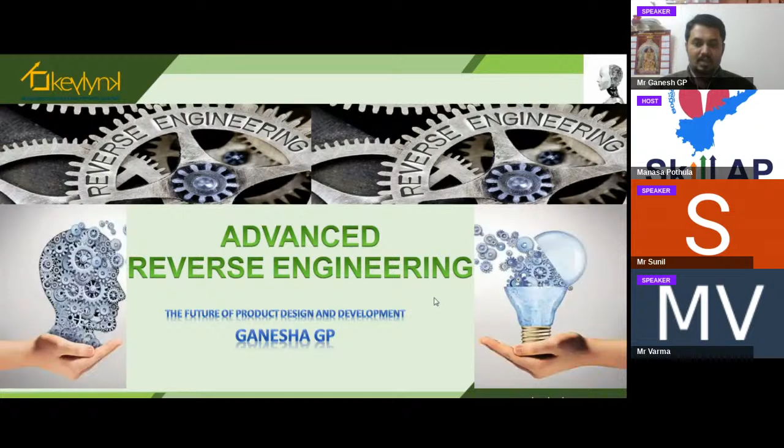Let's start the session. As we know, we are in an engineering field, and as the title I have given here suggests, Advanced Reverse Engineering is the future of product design and development. As we know, engineering is an application of science and technology.

So reverse engineering itself says we're going to do engineering in a reverse manner. Generally we have different types of engineering and different disciplines. Reverse engineering is not only about product development, but there is scope for much more digital advancement nowadays, because from the olden days till now we are having continuous advancement in technology. As we know, product design and manufacturing happens in three phases.

I can put it in brief manner. If I say in a virtual mode, we're going to have virtual prototyping, then rapid prototyping, and then manufacturing. All these three sectors will come under CAD, CAM, CAE. We're going to see that further.

That's why I have given the title Advanced Reverse Engineering. The reverse engineering process started along with forward engineering. With the backup of technological advancement, we have got digital platforms also. So we're going to see different things in this session.

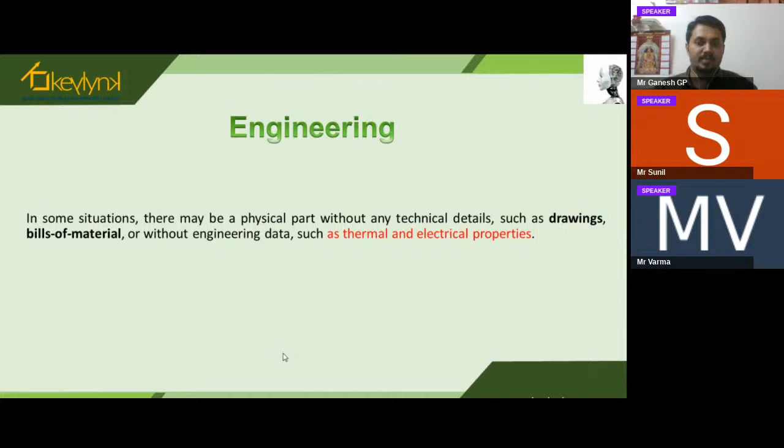In some situations, there may be a physical part without having any BOM, that is bill of material, or drawings, or you may have missing data of thermal and electrical properties. At that time, we're going to have only the physical part, not any other information as mentioned. So at that time, we do reverse engineering.

We're going to have a physical product, and we do a reverse engineering process over it. The reverse engineering process is nothing but duplication of an existing component or sub-assembly product that we already have, without having any documentation - just a scrap product. Using that scrap product by scanning it, we can replicate it and have a modification, a design optimization for that particular product. Finally, we can have further development of concept, and then a modification of the existing design that was there earlier.

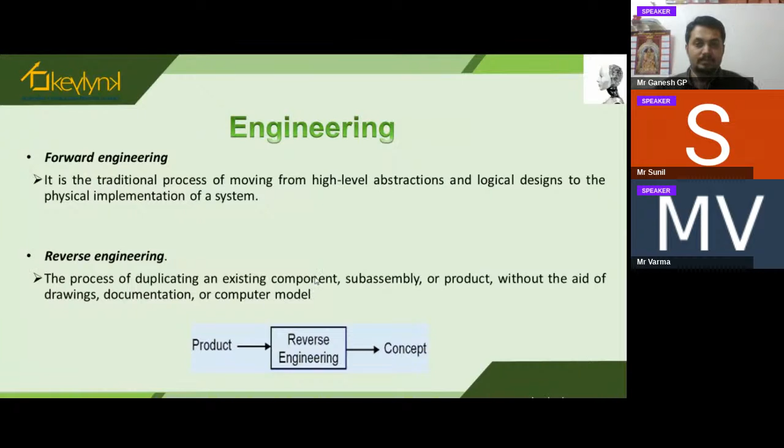So if we come to the history of design, how exactly design was made in early days - we used to have drafts, larger pads, tools and sketches. We were making everything with the help of these kinds of drafts.

I'm happy to share that I started my engineering in 2006. We were actually the first batch to migrate from draft to the digital world - I started with Solid Edge. So instead of having the draft, the migration was from physical creation to virtual creation - from draft work to modeling work, the CAD works. That has been migrated.

In history, we had all these draft tables and sketches, and by using these draft tools we were creating building structures and machine components - everything was created using these tools. Just think of it, with all these papers and tools, how difficult it was to create things with respect to precision and all those things.

Also, documentation was not as easy as we have nowadays, because now we have cloud computing. Because of that, we've got plenty of platforms for virtual creation, and documentation is easy now with respect to PDM software along with CAD modeling software.

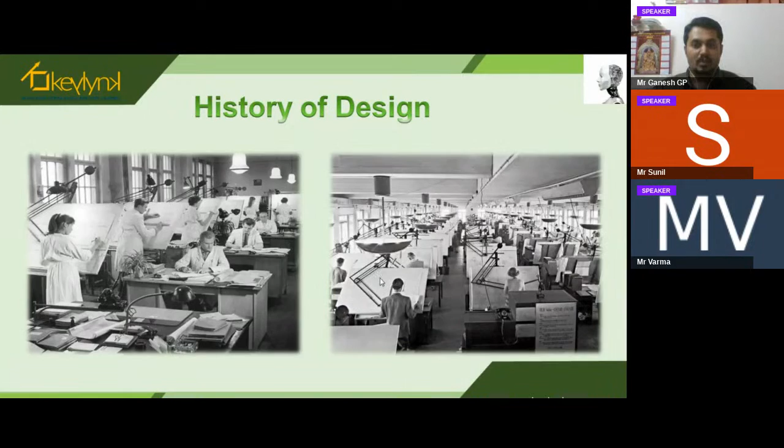So to add on, this is a picture of the layout that they were making in earlier days. You can see if you have visited any layouts, we're going to have...

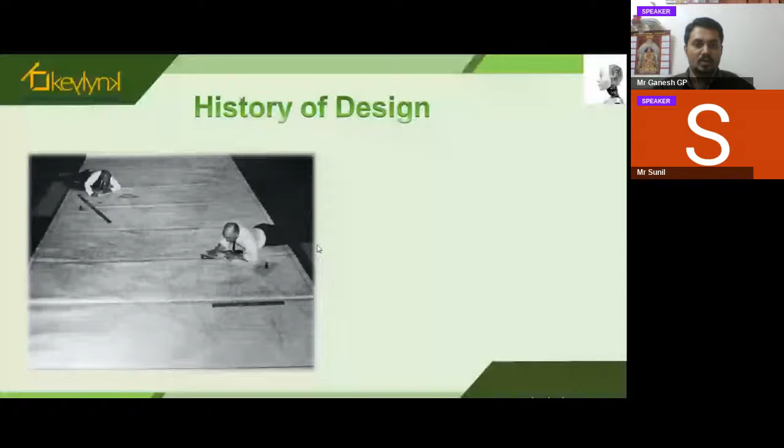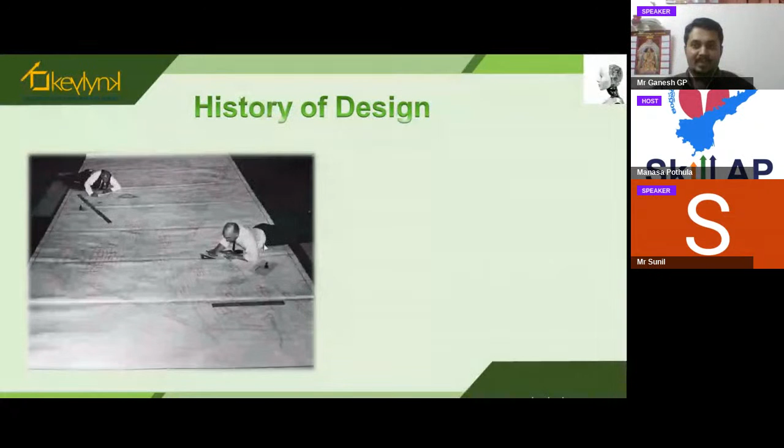Physically, it was a tedious job, as you say. You can see here also, so this was the draft. Still civil engineering has been using this, and mechanical and other engineering platforms in some universities still use conventional knowledge of drafting and skills. It's very much needed actually.

Starting with the geometric model using the CAD system, we were creating the wireframe, surfaces, or solid structures, then converting that into IGS format, that is universal format, or STL binary format, and then importing that format into the CAE system to generate a numerical solution. So as I said, CAD, CAM, CAE - computer aided design, computer aided manufacturing, and computer aided engineering. All three sectors are very, very important in any kind of design.

So here we were using CAD with the help of 2D, and then creating a 3D model, and then converting that into a STEP format or IGS format, universal formats that we used for any analysis purpose. Then for CAM systems, we used it and generated the NC code to have a manufacturing process.

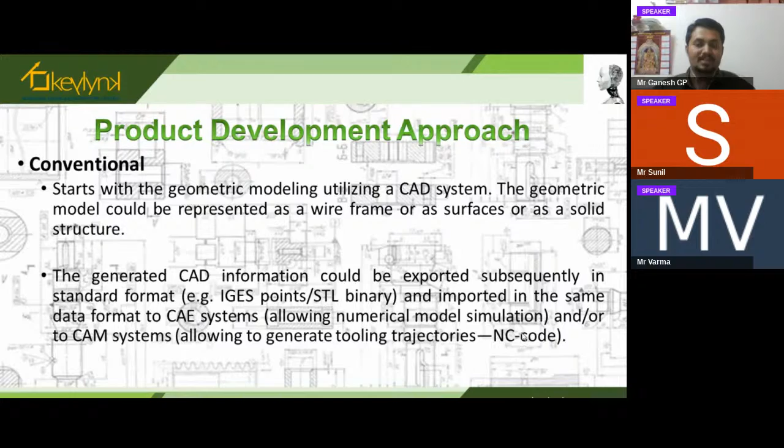But as I said, in the non-conventional method we have a physical model, but suppose if you don't have CAD data or any other data, we can use this physical model and replicate it with the help of a scanned model. We can use scanning operations and then have the entire model and replicate it.

Now we know that Yezdi, Jawa bike was there and they were manufacturing in Mysore actually. Now it has become extinct for so many years, but now Jawa has been manufactured with the help of world data and all those things that they have taken, and they have launched it now.

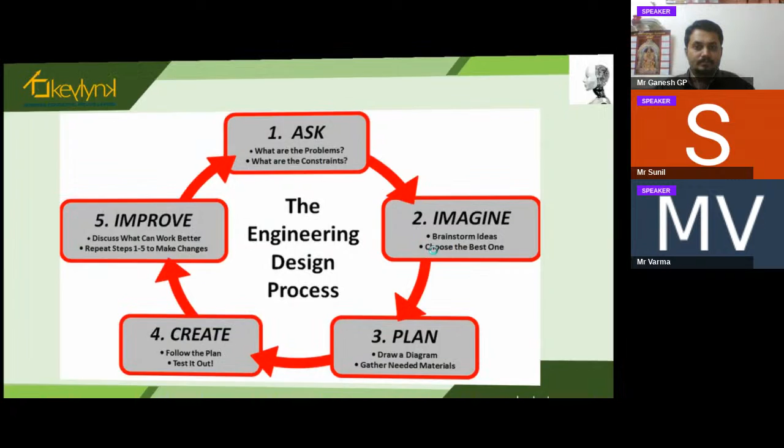So for any design engineering, we normally hear words called invention and innovation. So what exactly is innovation all about, and what is invention?

The major difference we have to know first is invention and innovation. Invention is nothing but creating a new thing. As we know, car has been invented, aeroplane has been invented, bike has been invented, locomotive has been invented, and so many products are there - mobile, laptop, computer, so many systems. Laptop is an advancement or innovation of the computer itself.

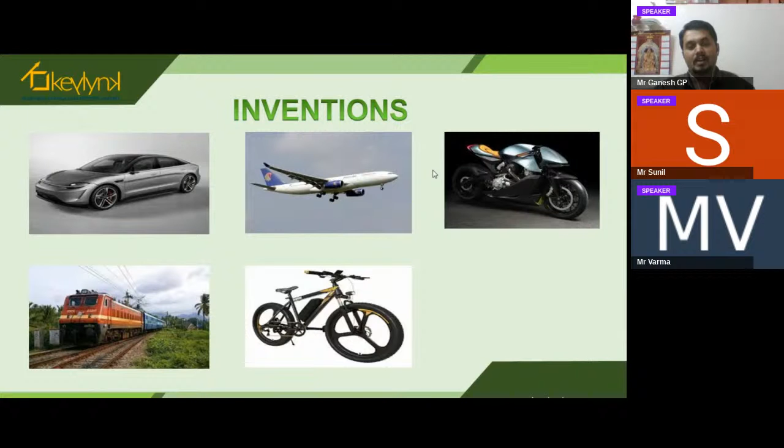So likewise, we're going to see in detail what exactly these inventions are and what exactly innovations are, and how the reverse engineering is correlated and very much needed for this invention and innovation.

So for innovation, I will take up a few examples one by one, and we're going to have a glimpse at each product so that we can understand in a better way how exactly reverse engineering has been adopted.

And how innovation is different from invention. If I take an example of cars, as you see on the screen, when the car was invented, we didn't know it would become a microcar, sedan, CUV or SUV, and so many other types. Now we have a plenty of designs - this is what we call innovation. Car is an invention, and these different types or classes of cars are an innovation. This is how exactly reverse engineering works.

When you invent something, we're going to work on that particular invention and modify some design, styles, aesthetic aspects, or performance aspects. Based on that, we're going to have a complete new product with some innovations, and for that product again we're going to have an invention with higher properties or aspects.

Next, if I take an example of bikes, we're going to have different classes of bikes again. As mentioned in the previous slide, we have different types or classes of cars, and with slight modification and different application, as you do the innovation, always with the help of invention we get some product. Then with respect to the end user or customers, we again have modifications based on their end use.

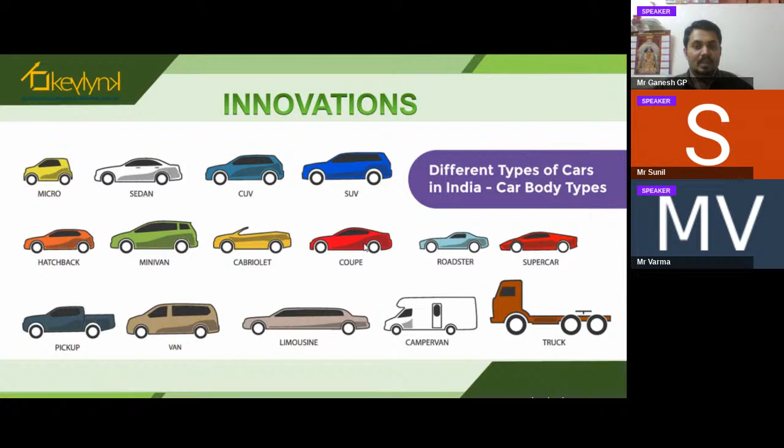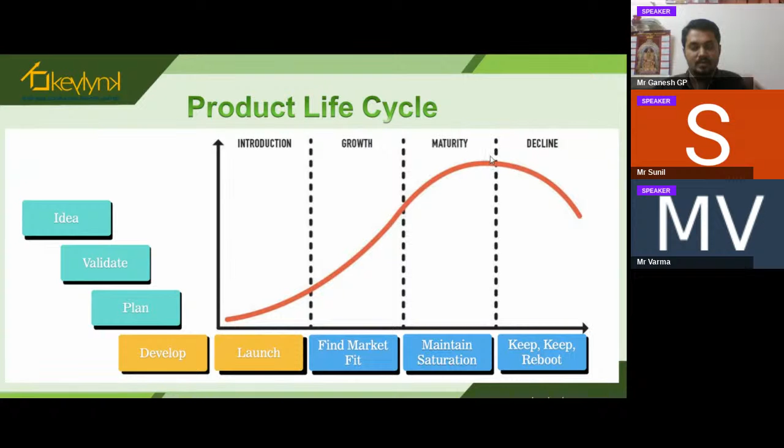So the need for reverse engineering, we'll see one by one. Suppose the original manufacturer of a product no longer produces it, as mentioned earlier, the Yezdi Jawa bike was there in Mysore, but now they are not producing it. For so many years it was not manufactured in India, but now it has been manufactured and brought back. Still, it has to cope up with the market.

Next, there is inadequate documentation of the original design. Even if I take an example of the Ambassador or old vintage cars, we may not be having documentation, that is 2D drawings. So at that time, we must have the physical prototype or physical model. Even if it is scrap, you can take that into the stage where you can have a benchmarking.

So the original manufacturer no longer exists, but externally the product is needed because so many customers who are fond of bikes wanted the Jawa, so that has to be rebuilt and brought down based on customer needs. The original design documentation has been lost or never existed. If you have lost the document but still have a physical prototype or scrap model, you can extract it using sophisticated scanners and get it back.

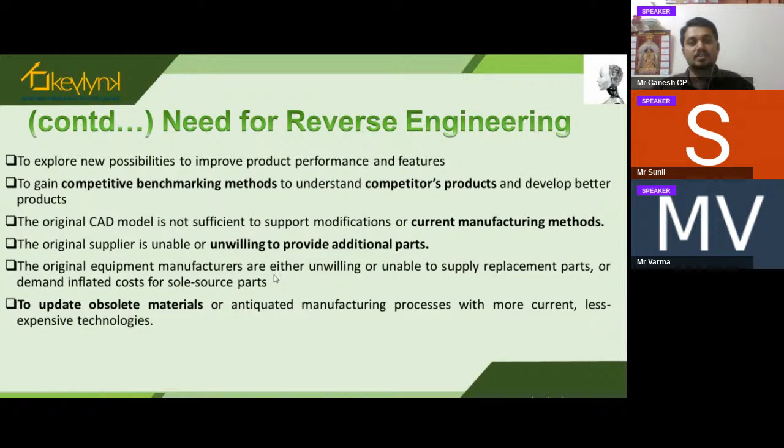And also, before doing any reverse engineering, we're going to see what type of customer it is. Based on that, we're going to have a continuous reverse engineering process, continuous design modification, and again we're going to relaunch it.

So as I said, the need -- if you have a need, then definitely we're going to have a purpose for reverse engineering. Legacy parts replacement, so we're going to have maintenance of that. And suppose if you have parts services and repair, and you want to do any failure analysis, as I said, for each and every product.

So all this, the purpose of engineering will come into picture when you have a proper product life cycle. So the purpose is mainly tied to that product life cycle.

Each and every stage, we're going to continuously observe those particular stages -- four stages -- and then we're going to have all these purposes.

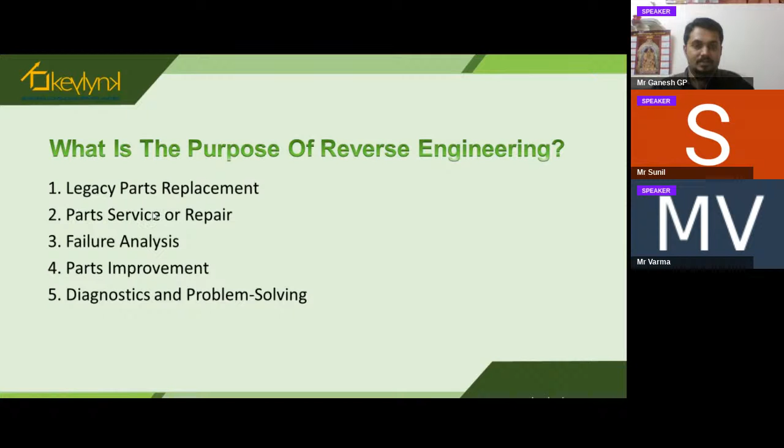So next we'll move on to the actual reverse engineering process -- how exactly the reverse engineering process is happening nowadays, and what advancement of technology we have got.

And as you see on the screen, this is the modern reverse engineering process. It also involves the conventional method of creation as well as the recent development of scan to 3D model.

If you observe the first stage, it is capture of three-dimensional data of a physical object. Earlier days we used to have 2D data -- we'd have drafts, and then we'd create that 2D data into 3D data.

This slide has a blending of both -- we have 2D to 3D, or you can have scanned 3D to again parametric 3D. So scan data gives us conceptual drawings or conceptual 3D models.

So all this data will be there, and with the help of a CAD tool, we're going to convert the 2D into 3D, and then we're going to have CAD creation or design modification happening through different software. Then we're going to have the production, and then we can have an inspection.

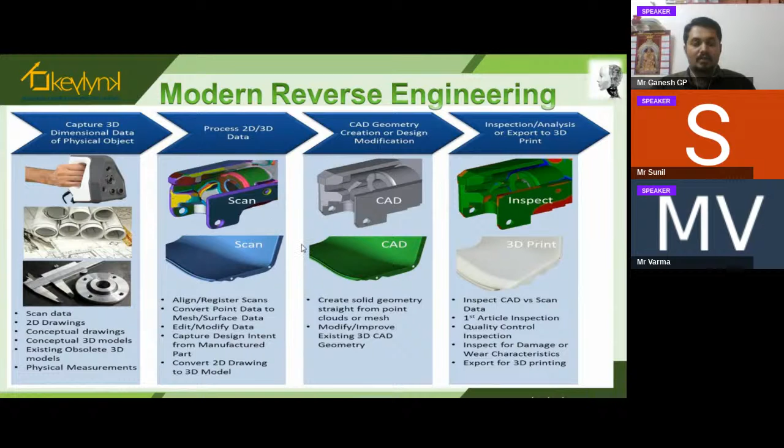So even scanners are used for doing the inspection of each and every product. So the process, as you are seeing here, is 2D to 3D conversion -- we're going to have 2D data, and then convert that with the help of different angular projection methods.

So how exactly does the reverse engineering workflow happen, as I mentioned in the previous slide. As I was talking from the beginning, we're going to have a physical part, either a scrapped part or an existing part.

After having this physical part, we're going to have a scanning process. The scanning process generates scan data, either in the form of point cloud data or mesh data. Normally we call it a .pts model or .mesh model.

So we're going to have .stl format model. Either of two types of model we're going to have, or it may be in obj format also. So normally we have point cloud data or mesh data. All this scan data will be available.

With the help of scan data, we're going to create a mesh. If you have scanned it, you're going to have a generation of each and every coordinate point with respect to the structure. Then by using those points, we're going to have a generation of mesh that will be a triangular element. By creating the mesh, then we're going to have region groups.

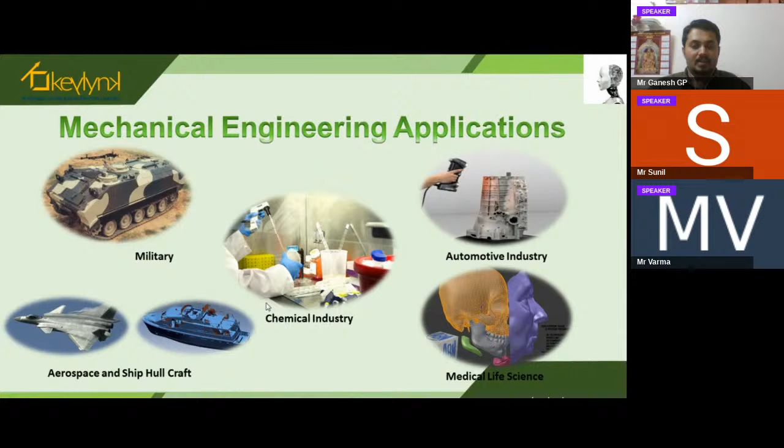In mechanical engineering, suppose you take military or aerospace, chemical industry, automotive industry, or medical and life science — each product has been scanned and modified based on the parameters I mentioned already, either a design aesthetic aspect, a performance aspect, or any other kind reviewed by a customer.

So what are the different benefits that we get through reverse engineering? As I was talking about each and every phase of the product life cycle, we'll more likely get into exploring existing designs and new ones.

That means we're going to have flexibility in design modification. We can explore new sets of thoughts or ideas and incorporate them for further innovations. If I take an example of transportation products — whether a bicycle, a bike, a four-wheeler, or a car — all of these are having advancements nowadays.

Nowadays we are talking about electrical vehicles, so from the IC engine to electrical vehicle advancement — that is an exploration again, that is an innovation again. So reconstructing a product that is outdated — whatever product we were having earlier, the outdated product.

Next, discovering any product vulnerability, meaning if you have any modification, is there any scope for further modification in the existing product? So all this will be having a benefit of doing reverse engineering on any particular product, creating a reliable CAD model for future references.

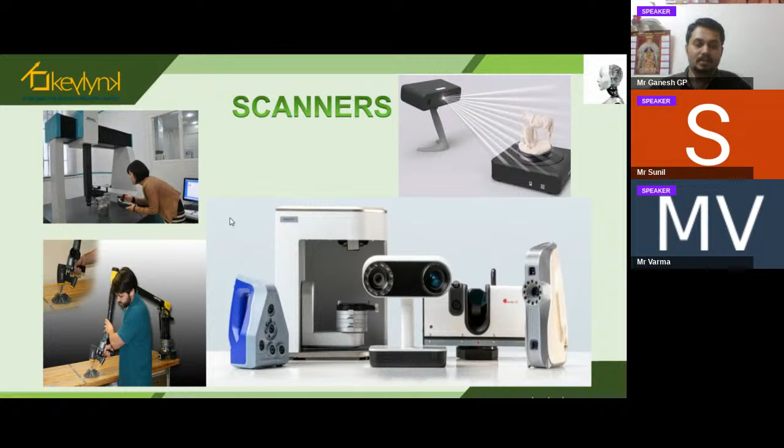As you watched the video, we have got different types of scanners in each and every product that you are seeing, so we have two different kinds of scanners: one is contact type and another one is non-contact type. All these you have seen through video, so that you have got a better understanding than just seeing through images.

In those videos, you might have observed without having any probe sensors. The videos that I have just shown, both of them, we were not having these probe sensors, so those two videos are related to non-contact type. I will show one more video related to the contact type.

This is related to the contact type scanners, where you're going to have these different types of probe sensors, either it may be optical, laser related, photogrammetry, or it may be a CMM. CMM is very widely used in industry for inspection, as I was talking about.

Reverse engineering is not just a tool, along with that there is inspection as well. As you have watched the video, it was showing different types of applications by using a scanner, not only for doing reverse engineering scan models, but it was used for inspection also.

It was used for creation of a miniature as well. So each and every aspect, by creating the mesh or point cloud data, we can extract each and every feature of a particular product with the help of these scanners.

I will show one video related to the probe sensor where exactly the critical shapes can be extracted with the help of probe sensors. For any complex models like car or aeroplane, we can have hand scanners like this. This is of non-contact type. It may be different variants, and each and every product has their own manufacturers.

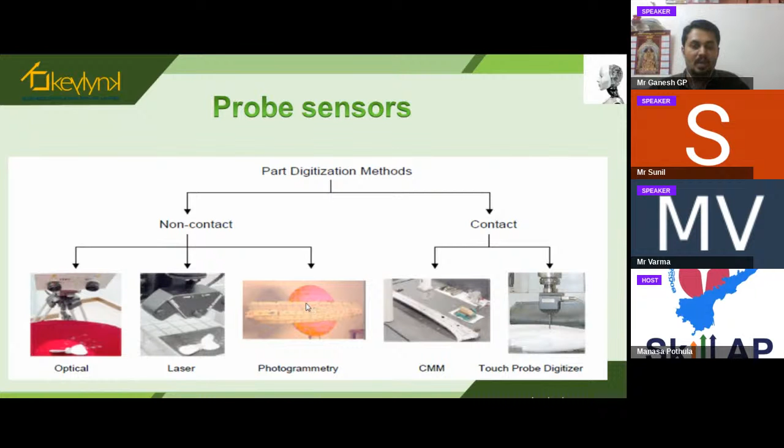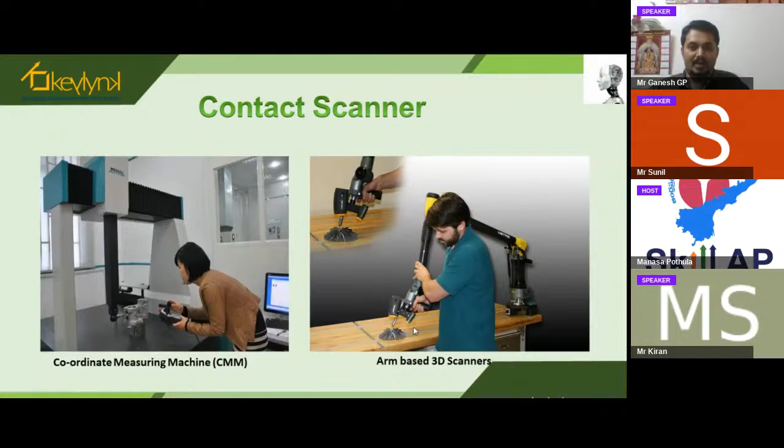So as you've seen that video, you can have a complete overview of contact types. We were having a probe like this, which you can use for better profile extraction or scanning of particular data. Comparing contact type and non-contact type: in non-contact, as the name says, we're not going to have probe contact on that particular product. So if you want detailed extraction of a particular intricate shape, it would be preferred to use contact scanners instead of non-contact scanners.

And we're going to have different types of CAD software. As we know, different CAD tools - either SolidWorks, CATIA, UG, or Creo. Each and every software has their own interface, so we're going to have different graphic user interfaces with respect to the different softwares.

But for this training, I have taken the example of Xtract3D, an add-in for SolidWorks, and also Geomagic for SolidWorks and Point2CAD. Majorly, Xtract3D and Geomagic are used as reverse engineering tools for SolidWorks. These tools have a live transfer option for different kinds of software - either SolidWorks, CATIA, or Creo. We have a live transfer in the sense that we're going to create the exact similar model that we normally create in a 3D model.

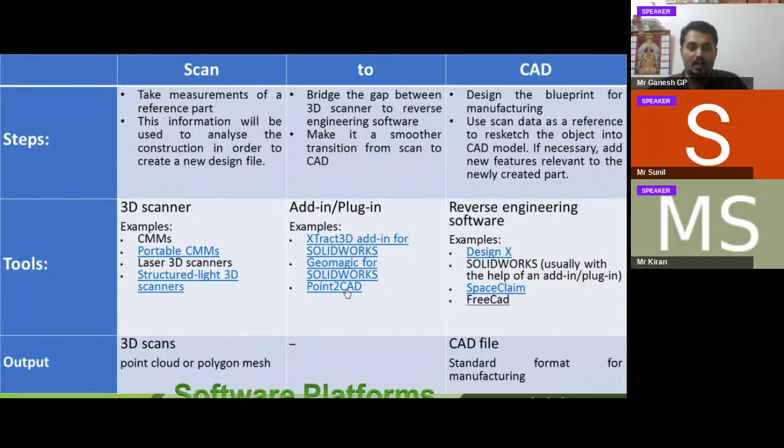That will be created by using the Geomagic DesignX software. By using DesignX software, we're going to create a model - either a parametric model or a non-parametric model. After creating each profile, we're going to have a live transfer, which I will show you at the end, and I'll explain exactly how the process happens and how the reverse engineering tool has been used and converted into a CAD file. So this is how the steps and different software platforms work for reverse engineering.

And normally in each reverse engineering process, we have one question: which option is right for me? The industry may ask whether I've got to use contact type or non-contact type. Again, it depends on the type of product you are making as a reverse engineering product, and how exactly that scanning method is used to extract the data clearly.

The end product that you're going to make has to undergo innovation or modification. For that purpose, you need a better scan data to have very good quality data. So the selection of scanner is also very, very important - what is the best method of scanning technology or technique you will use. Based on that, the end product will reflect, because quality matters again.

With respect to the normal scanning or benchmarking method used in earlier days - manually measuring each product and replicating it into 2D and then creating it into 3D - it was very complex. Now it is not like that. By extracting each coordinate point, we can have accuracy almost at the micron, even nano level. That much accuracy we can see in scanners. As you watched in the video, they mentioned 25 microns, 50 microns - that is the depth of accuracy we get through the scanning process.

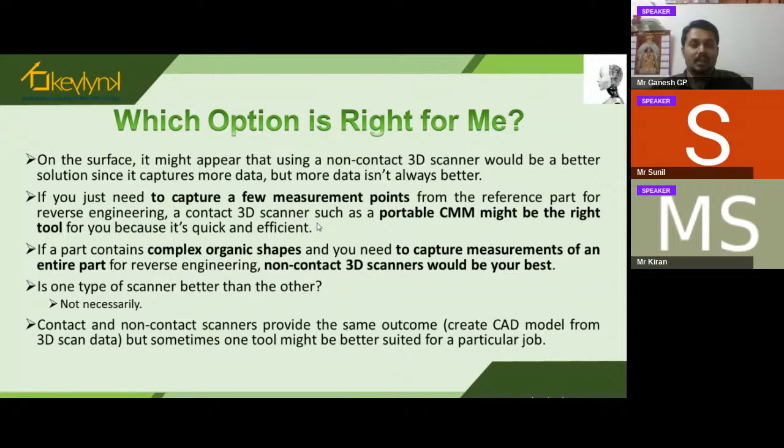So then about 3D printing, this also comes under CAD CAM CAE, as I was mentioning earlier about 3D printing.

Suppose you have a reverse engineering component, nowadays even a small gift product that you see in gift shops or markets, each and every such product is a mold product. Now because of the advancement of 3D technologies, rapid prototyping and assembly all come under additive manufacturing. Additive manufacturing has seen a lot of advancement for product development as well as reverse engineering. We now even have examples of 3D built houses in Dubai, where in Arab countries they are making 3D printed houses.

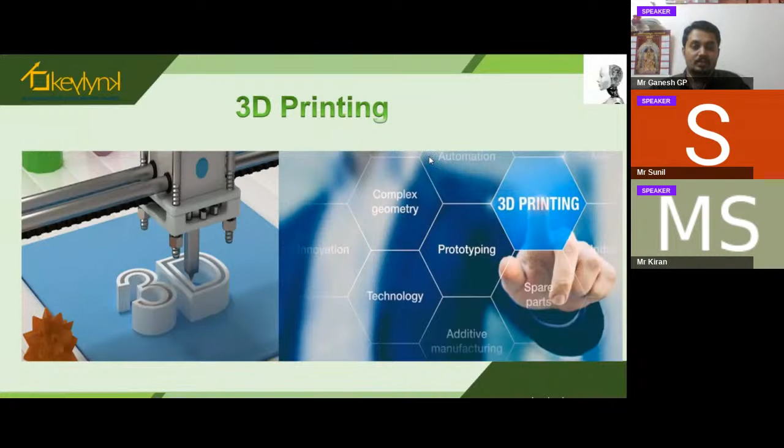With the help of these 3D printing technologies, we can get all these kinds of products in very little time, and also without any wastage of materials and such things.

Now 3D printing technology is focusing on getting products with the help of metals and alloys, which is a very difficult job to achieve. So research is happening in that direction.

If we take these examples into account, 3D printing technology has even been used for creating patterns for mold or casting. So likewise, there are plenty of uses for 3D printing technology.

As I mentioned, through that scan data you can enter directly into CAD CAM CAE. This is also a reverse engineering product with modification, and you're going to have a prototype, or it may be a pattern for making a casting, or it may be a jig, or it may be a fixture for creating a product.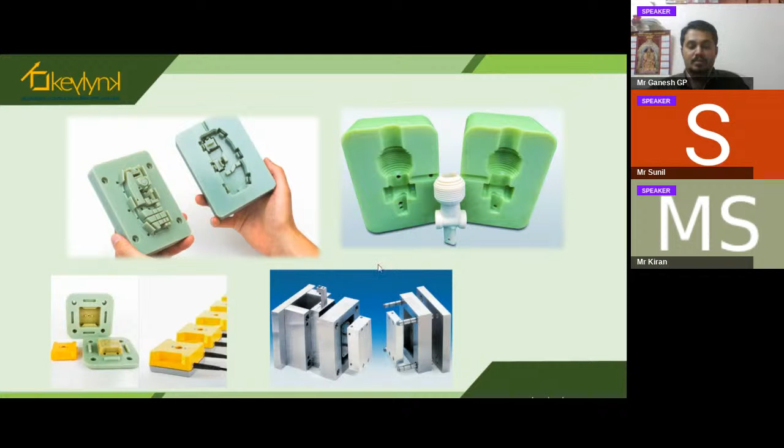In engineering, creating a product requires considering how important the design is. Equally important is tooling - creating a tool to make a particular product is a tedious job. Creating jigs and fixtures would be very helpful for recreation and modification with the help of reverse engineering, which is an added advantage for the reverse engineering process.

As I said, the future of reverse engineering again comes under CAD CAM CAE. As I mentioned in the beginning, we have rapid prototyping - initially virtual prototyping, then rapid prototyping, and then manufacturing. This is the sequence of operations carried out in industry.

So we're going to have a scanned model - this is geometric reverse engineering, and this is how the process happens. If you have a scanned model, with the help of that we can create a CAD model and then send it to CAM, so that NC generation and profile generation happens with the help of programming. The machine will complete that particular product with respect to its features. Also, after completing the product in terms of CAD, then we go for CAE.

So we're going to do the engineering analysis, whether it will work for the existing environment with respect to the load conditions or the performance characteristics. So with the help of different CAE tools, ANSYS, mainly ANSYS Workbench is being used, Nastran. So many software CAE tools are there.

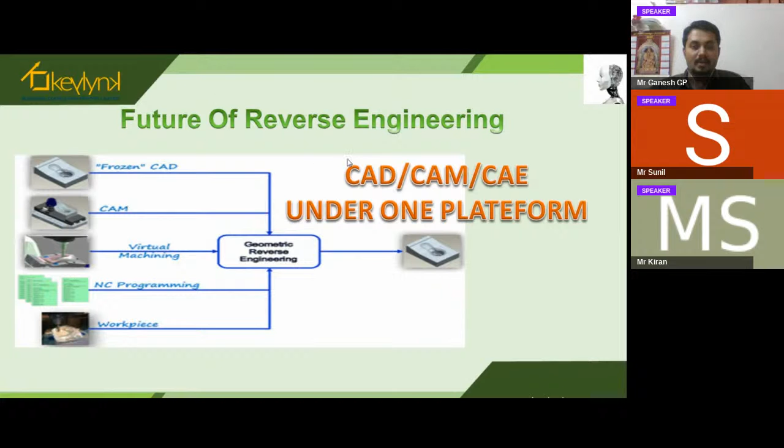And then we have Mastercam, NC programming software. Each and every CNC machine, Fanuc and different softwares, the machine itself will give an interface. So different industries will have their own interface. With the help of that scan data, imagine all these three platforms are under observation and under the control of this reverse engineering process. So the complete process will happen through this media.

And normally each and every person will have a question. So everything is okay, that means the technology is advancing and the situation is like this. And what could be the job opportunities for the reverse engineering field?

That means reverse engineering is a part of R&D. As the name itself says, research and development. That will happen through reverse engineering only. So there we're going to have a design stream or design field.

So there, all these job profiles or designations are extracted through different job sites and job descriptions in industry. They will call these designations either design engineer, R&D engineer, CAD, CAM, project research technician, application engineer. These are all the normal designations that you will get when you get into the design stream of jobs, or it may be an R&D job.

So these are the different job opportunities you can expect by knowing this reverse engineering process. But fundamental and basic things you must know about it.

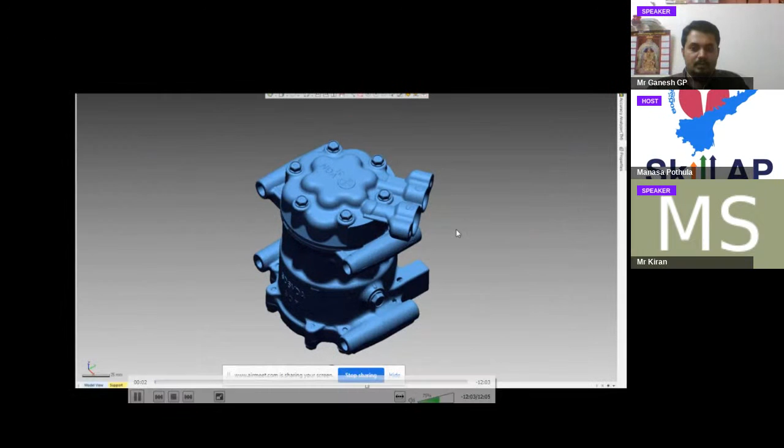This is one of the mechanical components that you are seeing. This is the scan data that we have. After scanning, we're going to have different types of regions, as you see here with different colors. First we scan the entire model. After scanning, we're going to have the region or grouping by using the software, either DesignX or any other tool. For now, I have taken the example of DesignX.

So here we have different regions, and each region has different colors, meaning we are having different mesh data with respect to triangular shapes. Normally we're going to have a tetra mesh, so triangular elements. For different types of intricate or curved shapes, we're going to have small triangles. Likewise, we're going to have different scanned triangles.

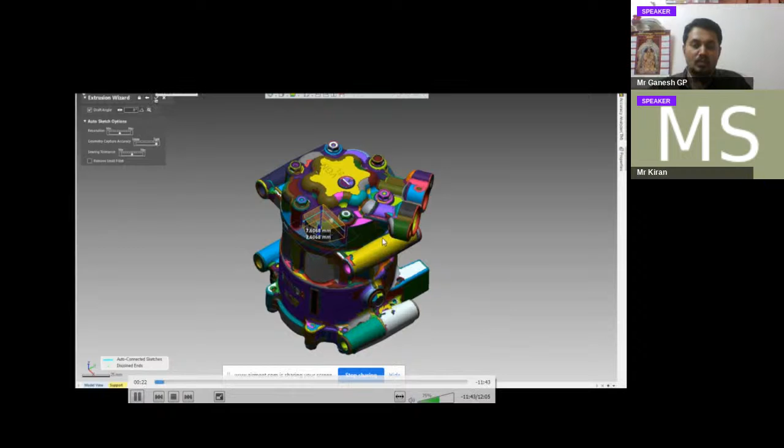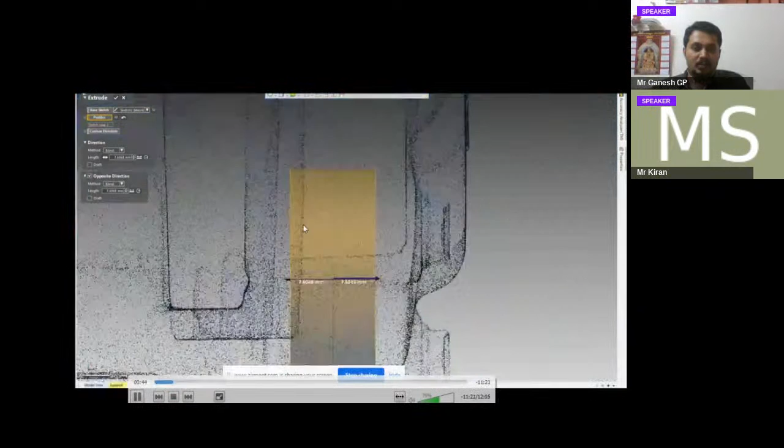Based on the profile that we have, we're going to select those particular regions. By choosing those regions, we can have a normal extrude operation. If you know about CAD software, you can understand better what the video is telling you. By having this reference, with the help of a region, this is a non-parametric model, just an extraction of a circle, and then we are extruding it and matching it with the scanned model.

So we are just creating this with respect to the dimension that we have in the CAD model. Likewise, you can have each and every operation, either a fillet or an extrude. Extrude is just creating this circle with respect to the length that we have. With respect to the number of profiles we have here, we have six of the same kind, so we are using a pattern tool to create it.

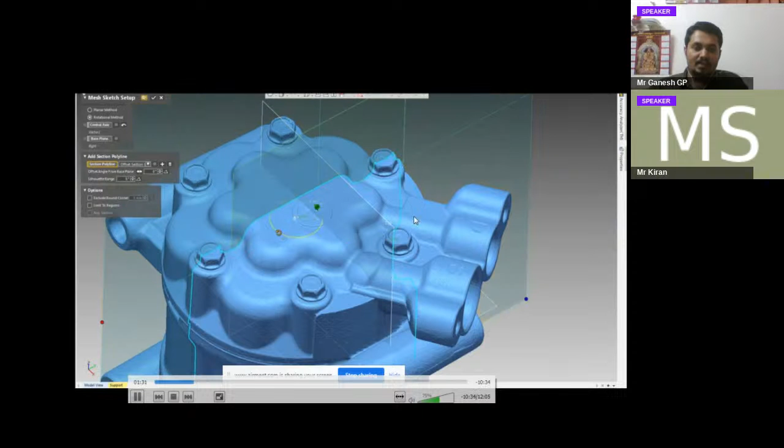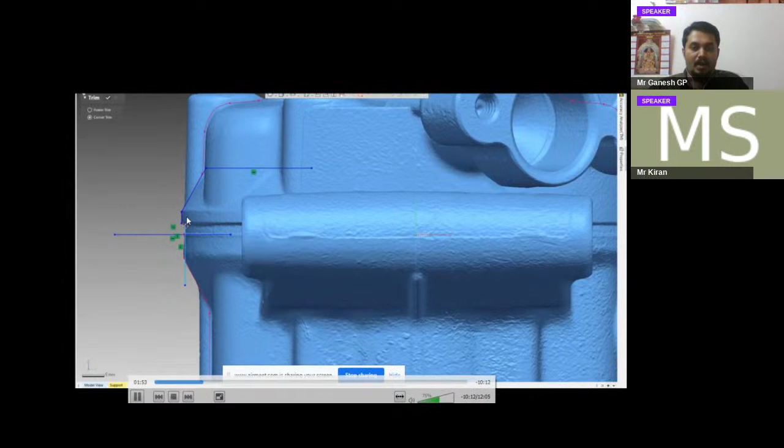Likewise, by seeing the scan model, we are having a section. You can have visuality here. So here we are having a section, and with respect to that, we have extracted a sketch. With respect to that sketch, we're going to recreate the actual sketch. With reference to this, we normally extract these sketches and recreate them. Along with that, we're going to have constraints, geometrically and dimensionally. With respect to those constraints, we can call it a parametric model. You can have this angle or chamfer, you can have this length.

So you can have a variation further. Suppose if you don't have any modification in the dimension, then we normally call that a non-parametric model. We're going to have a continuous interface with respect to the scan model as well as the physical model that we create. And then we can have deviations, so along with this, it can extract the deviation, how exactly it is deviating from it.

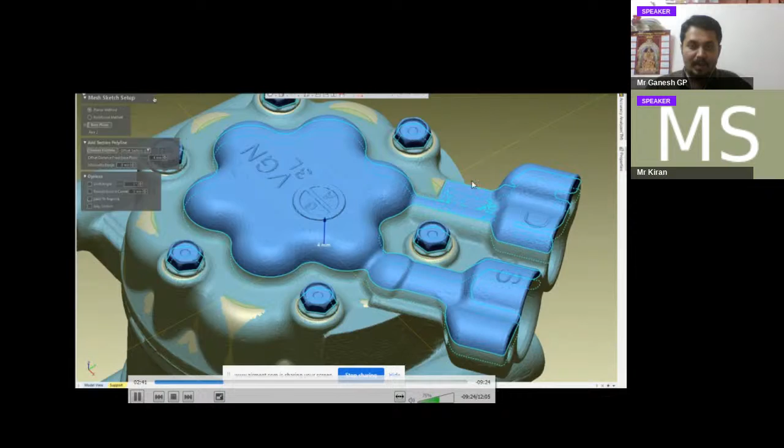You can observe here the upper surface is sliced with the help of this plane. So by creating individual planes, we can extract these outlines. A few automation tools are also available in the software, but with automation tools only a few features can be created easily. For complicated shapes, it has to be created with manual skills only.

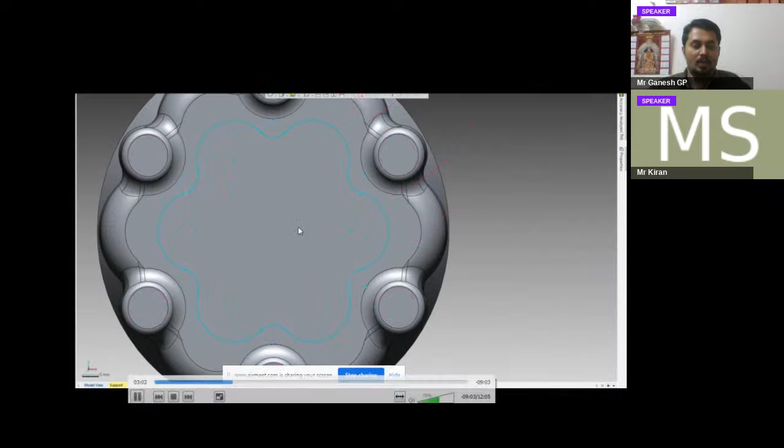That's why I said you must have at least two modeling software knowledge, so that you will have a hold on the graphic user interface. You can extract the knowledge of extrusion, cutout, hole creation, sweep, swept, loft, like this. Each and every software has their own namings, but the process remains the same.

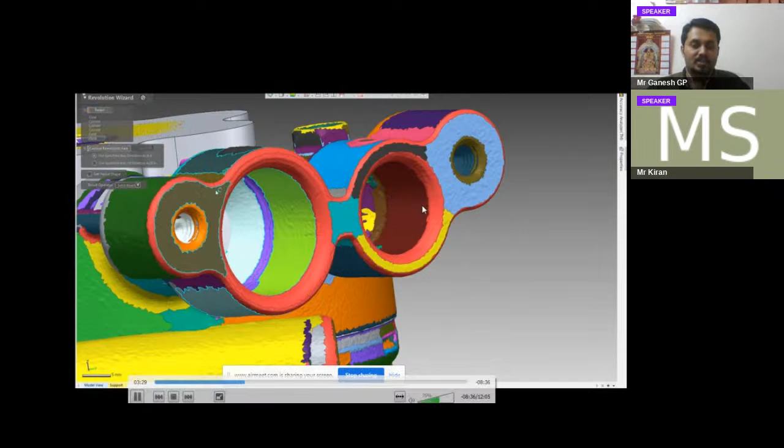So here this is a revolved part. We need to create a sketch and then revolve it with respect to this axis. All these constraints that we are talking about are geometrical constraints, not dimensional constraints. We're not having any dimensions here, but it has got constraint with the geometry, meaning it has coincide, tangency, everything. Now it has been created with the help of axis and then the revolve command.

Similar to your normal CAD tool, the CAD plugins also have a similar set of commands, so that you can easily recreate the scan model and get the CAD model.

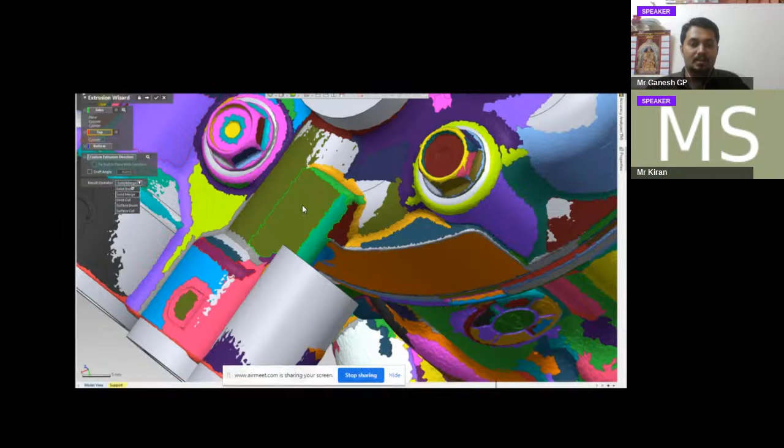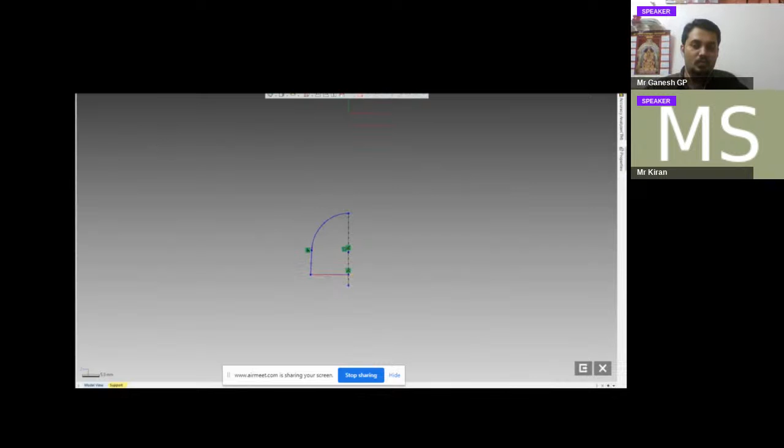So this is a normal way of creation. Even if you are experienced persons or already in industry, you may have knowledge on Boolean operation as well, that means intersecting two profiles and getting the required shapes. In industry, that is very much needed.

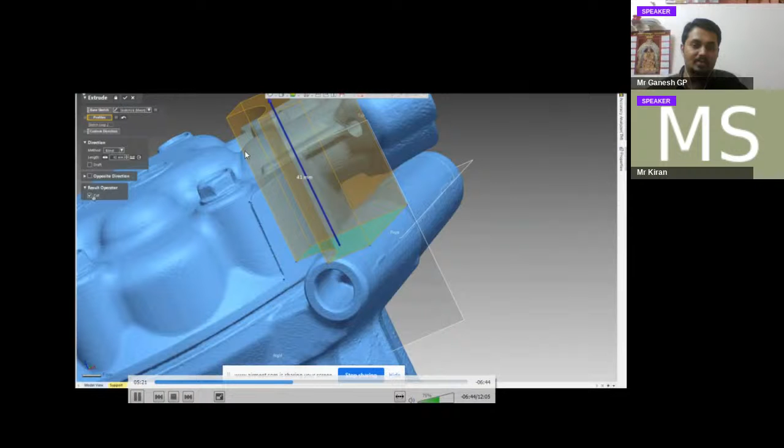So here also, by slicing that particular section with respect to the planes that you have, you can also create this section. By using this arrow and with respect to the plane, you can adjust where exactly the section is needed. You can extract that particular position and then extract that sketch to the required plane or reference with respect to the distance, and then recreate this by using sketch tools. You can create by using splines and normal lines or polylines, and then replicate it and create it with respect to the distance to where exactly the scan data is available.

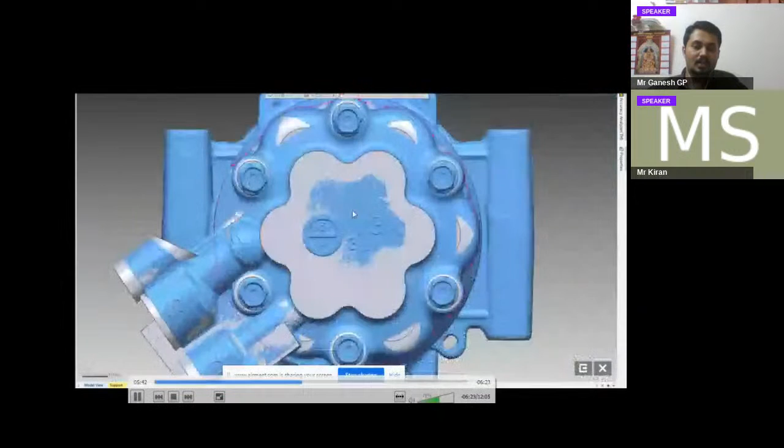So to work on this reverse engineering tools or plugin tools, you must understand how to read a drawing. As I was talking about the language of drawing, so that you can have perspective views. Just imagine that converting 2D to 3D is a little bit tedious compared to this, right? Because you're going to have only two-dimensional drawings, and to convert that into 3D, you will have one more interface in between, that is your mind.

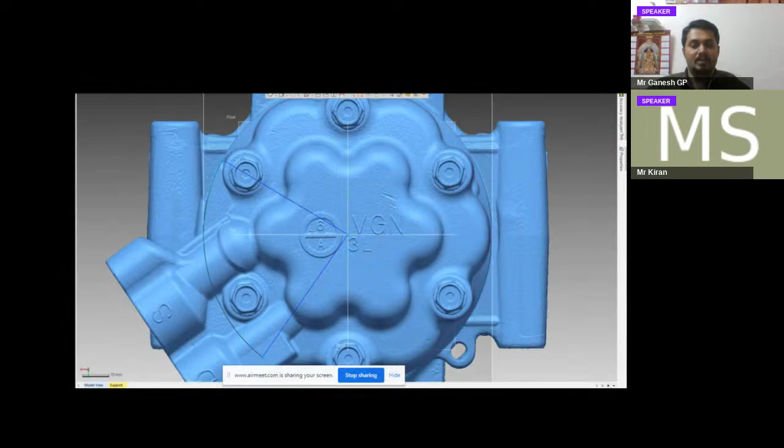You must imagine that particular 2D virtually in your mind as 3D, so that the front view looks like this, top view looks like this, isometric view looks like this. So all this will require imagination in your mind. For a few components we normally give isometric as well, but still a few critical features can't be visualized with the help of 2D. So the 3D scan data is very helpful in that particular section, and it makes a big reduction in the recreation of an already existing part.

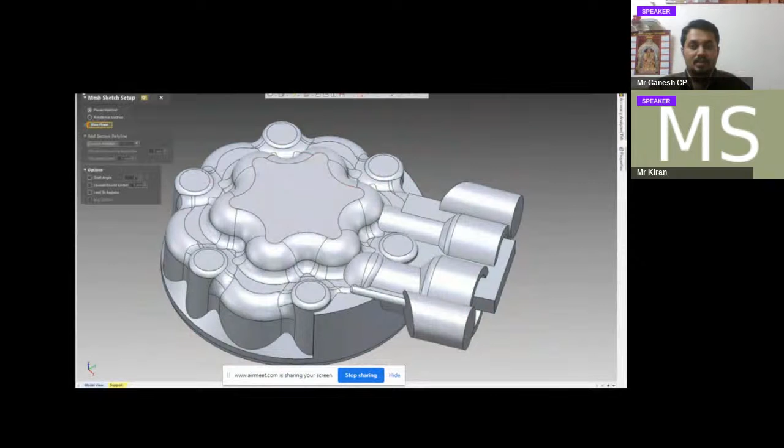That is very, very important when you come across the product life cycle, because you have to compete with the competitor's product and also launch it much sooner than they do. So before launching, suppose if you are competing with any kind of product, as I take an example of mobile itself, before launching that particular competitor's product, you must launch first.

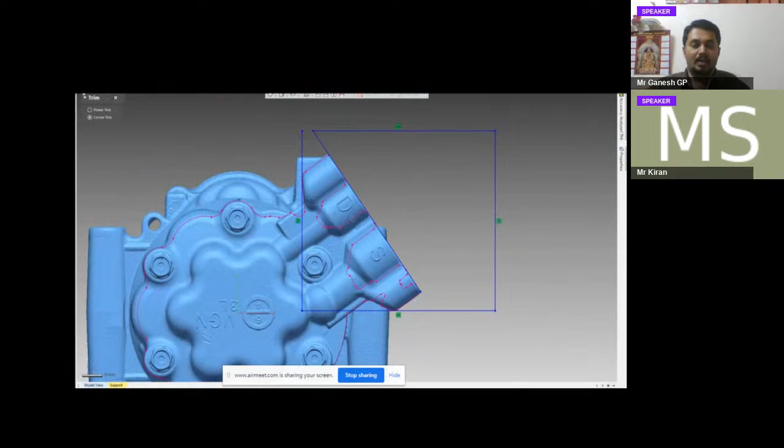You must upgrade yourself first with respect to the product's aesthetic or technical aspects, in any manner, any specifications. If you want to upgrade and compete and grab the opportunity in the market and increase your profit, you must be in a position to respond to customer feedback quickly, so that you can have a better product system and maintain your brand.

I hope by seeing this video you got the entire overview of what I've said earlier, that reverse engineering is all about, and what exactly the usage is in the engineering field, how exactly it copes with design optimization, and how products are developed with the help of reverse engineering, and how it has been used in a product life cycle, that is benchmarking. So that is a wide and vital application that we can see in each and every product industry, whether it is automobile, aerospace, or mining - plenty of industries. So each and every industry has a scope for reverse engineering, and it will continuously grow with the advancement of the tools.

So you must be upgraded with the skills so that you can grab the opportunity, as I mentioned. So you must always be upskilled, otherwise the market will not be there for you to get a job as well.

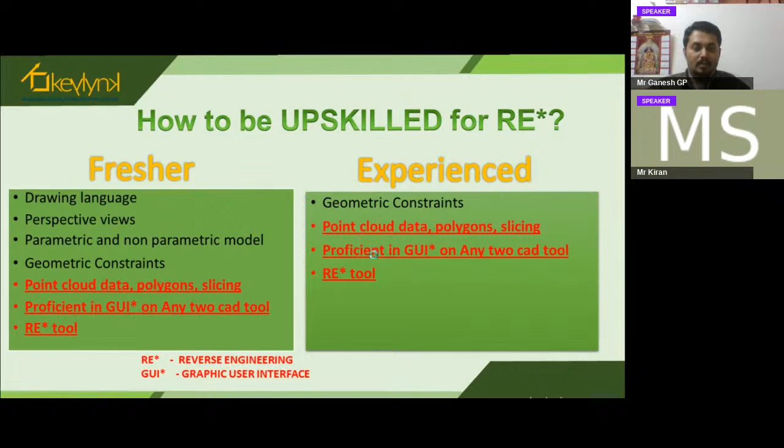So I hope I have completed all the content that I mentioned. So if you have any queries, please give them in the chat section or let anyone ask a question orally.

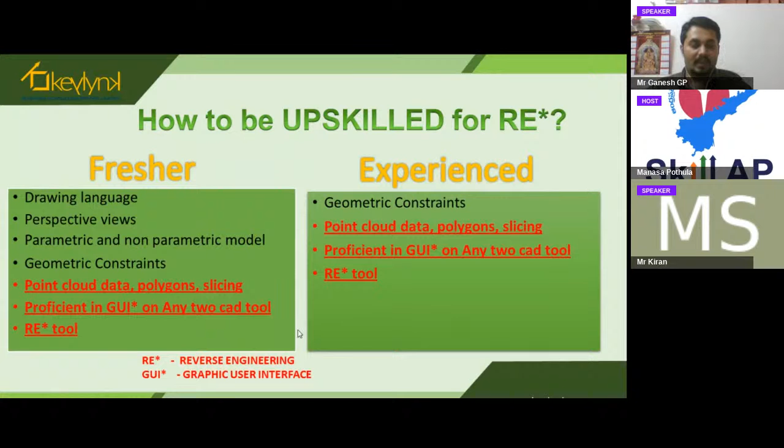Is there any kind of training or resources that you can suggest? Yes, you have plenty of online platforms as well as in Bangalore, Hyderabad, or Chennai. So you can have plenty of options to go with training institutes.

And also you have the option of Udemy. But one more important thing I can suggest to freshers and any engineers who have completed their engineering - by having an online platform, you can't understand each and every bit of the things that happen in industry. So you must have a physical trainer so that you can have a better understanding, and you're going to have continuous monitoring on the work that you carry out. Because whatever models or assignments you come across with online platforms, you may do it, but it can't be enough to understand in a better way.

So if you have any set of institutions nearby you, or if you come to Bangalore or go to Chennai, you're going to have plenty of options. There are various institutes that give reverse engineering tools training as well.